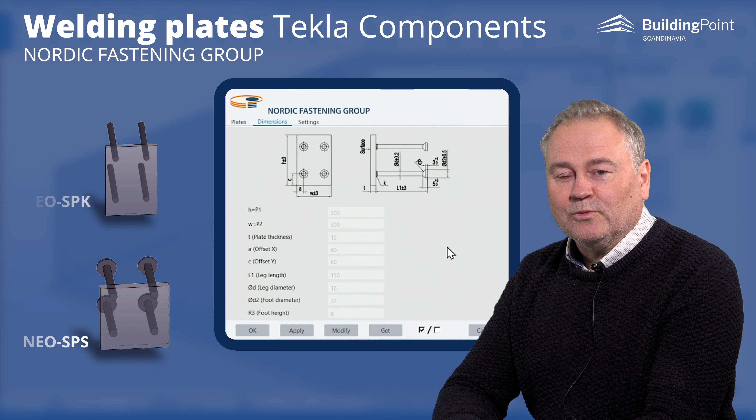We have created a Tekla component for Nordic Fastening Group's welding plates. Let me show you how it works.

After downloading the component from Tekla Warehouse, it will be available in the component and application section. Double click on the component and you will find two different types: SPS and SPK. Both of them come with a different number of different sizes. You can also set a different prefix, start number and class.

Are you interested in the different dimensions of these components? You can see them here. You can also choose to add it as an individual assembly or as a sub-assembly. And of course you can set your own settings and save it.

Now I will add the component to the floor. I choose the right size, apply it, and pick the floor. Now I will pick the temporary first point. I choose the corner and I would like it placed 4 meters along this edge. I put another temporary point.

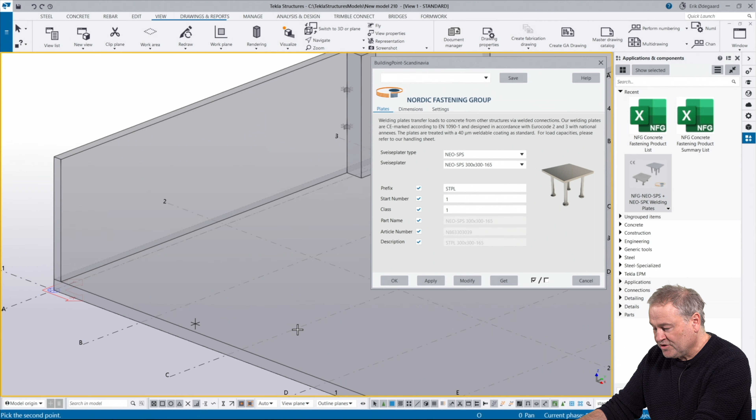I would like it to be placed 500 millimeters from the edge. This will be the center of the welding plate. So I choose one edge and then the other edge as for a plane. Now I have the component correctly placed.

I can now copy this component along the edge here, and I would like it to have 2500, and I would like to have 4 additional components.

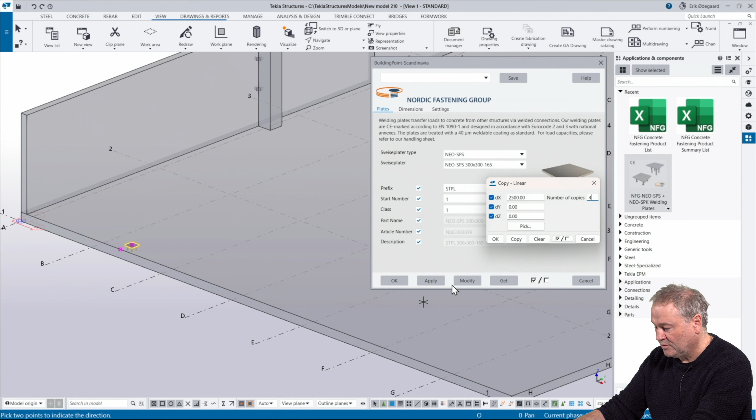I can also choose one of them to be a different type. Very easy to do. Now I am very soon ready to order.

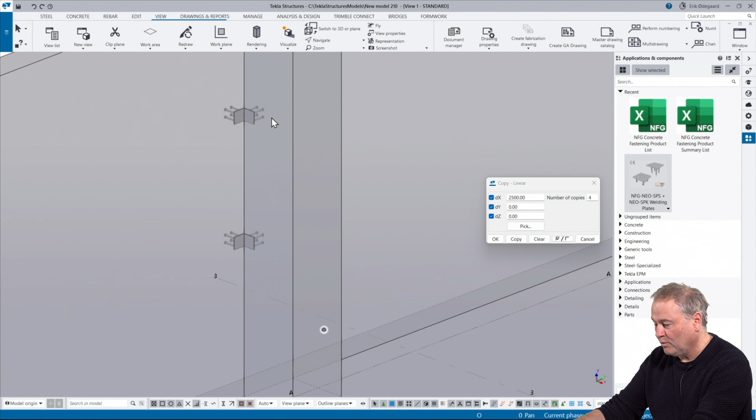I just want to check that my components in the wall to beam connection are correct. Looks good. And now I'm ready to order them from Nordic Fastening Group.

I choose 2 points, and now I can open the list just to check if it's okay. Here you can see I have 4 of the 100 by 100, 4 of the 300 by 300, and I have one optimal 250 by 150.

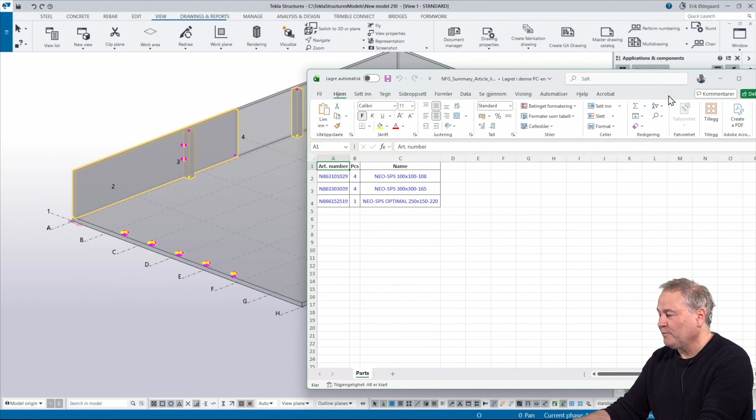That's the last one. Just send this list to Nordic Fastening Group and you will get the correct parts. Thank you for watching.